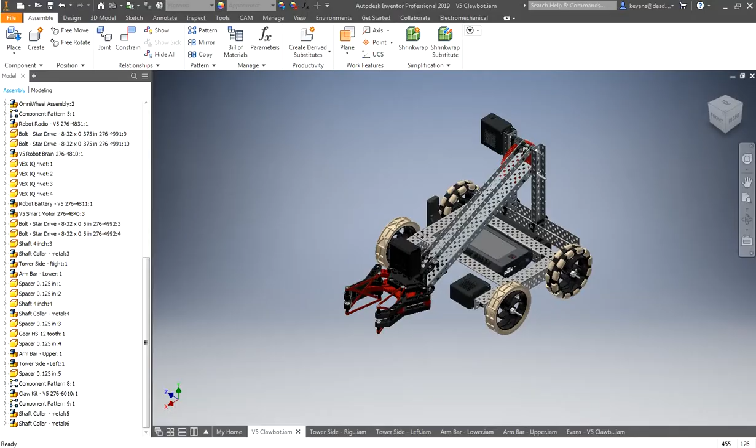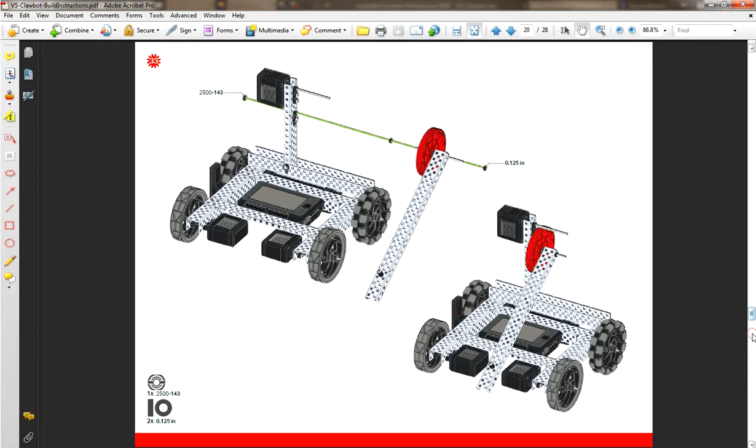Now, looking back at the instructions, you can see they have us build the tower sides, add a motor, connect one side, build the upper and lower parts of the arm, add a gear to the one side, and then start to install those onto the tower, eventually adding the second tower arm and completing it with the claw.

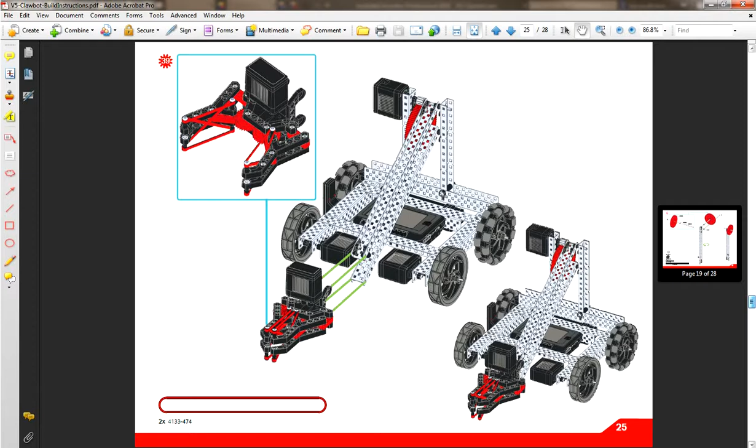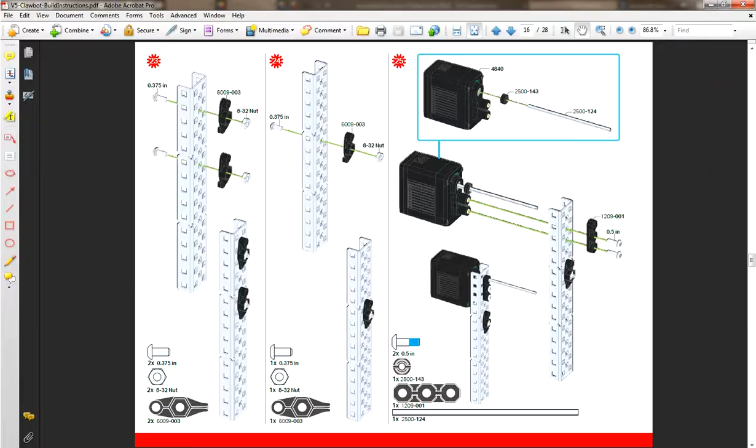Okay, we're going to follow a little bit of a similar procedure. The instructions have you build the two tower sides and set them aside till you need them, and then build the two arm sides and set them aside till you need them. We're going to do much the same in Autodesk Inventor. We are going to make small assemblies for the right side of the tower, the left side of the tower, the lower arm bar that we will attach a gear to, and the upper arm bar.

Looking at the instructions for how to build the tower sides, we can see we need a 15-hole C-channel and two of the single post axle bearings bolted on with 3/8" bolts and 8-32 nuts. The second tower side has one of these, but then we'll get a motor and a bearing flat.

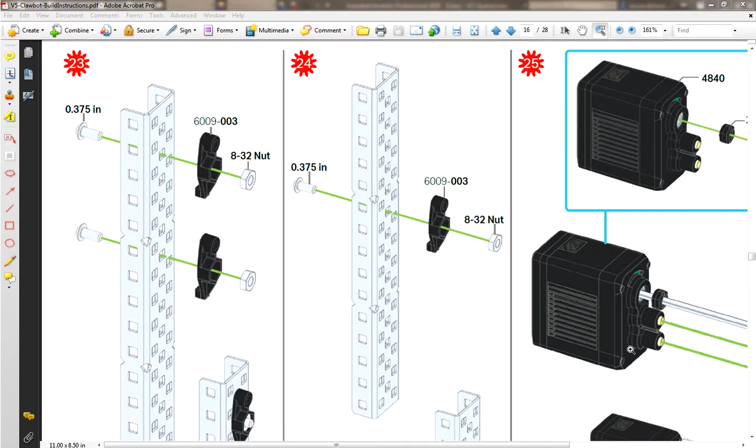So in Autodesk Inventor, I need to start a new assembly to make this separate little part. A couple of ways you can do that. I can go to File, New, pull an assembly out of here. I can just click here for the shortcut for new. I could also use Control-N, pick a standard assembly. I'm going to bring in the C-channel first in the structure folder.

15-hole, there we go. Now that bearing, nut, and bolt, if you recall, we used that earlier and made an assembly out of it. I don't need to place individual parts. I can just go back and find that assembly. One post bearing, nut, and bolt. I can bring in that assembly as one unit.

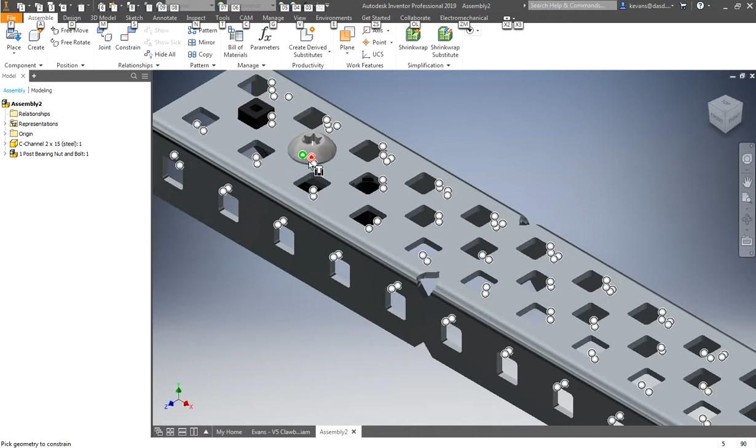The bolt from the picture in the instructions attaches in this second hole down on this side, and then we just have to spin around and get the axle in this location. There we go. I could simply add a second one. I could do a component or copy the pattern with the component.

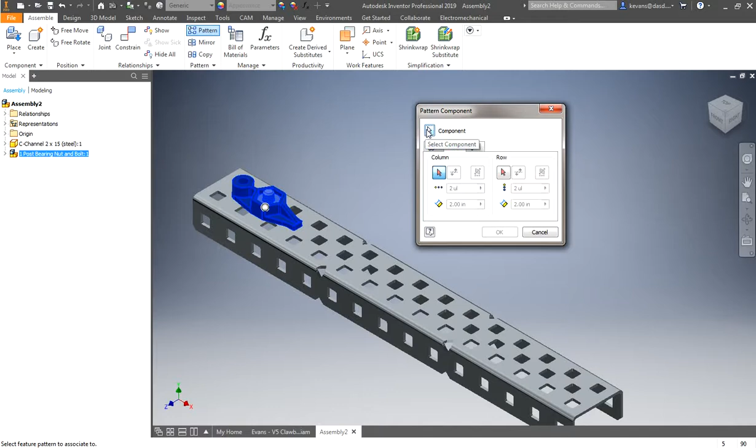So let's go back to the pattern feature. It's going to be a rectangular pattern. I already have this component selected. Pick my direction. We're going to go this way. I do have to flip it. By default it wants to go the other way, so I click the flip direction icon and I make sure it goes into the proper hole, and I believe that is the proper hole, just 2 inches down. Click OK, and we are done with that tower side.

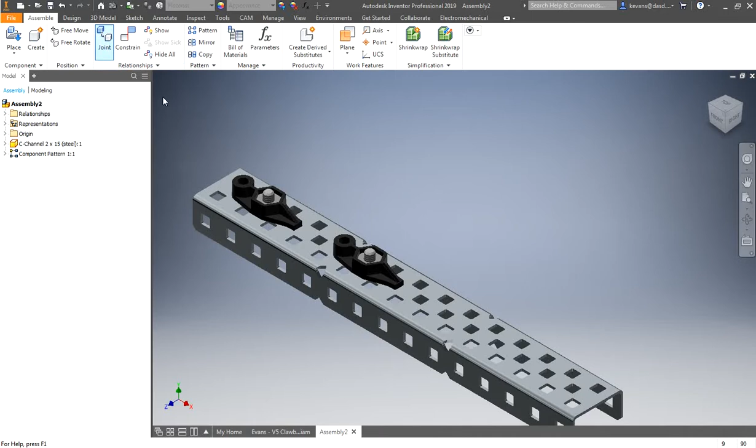Now we need to save it and give it a descriptive name, so I'm going to go save, and since it has never been saved and it is a new assembly, it suggests the name assembly 2 for me, but I do want to change it. I am going to call this a tower side, and when you're looking at the robot from the back facing forward, it is the left tower side.

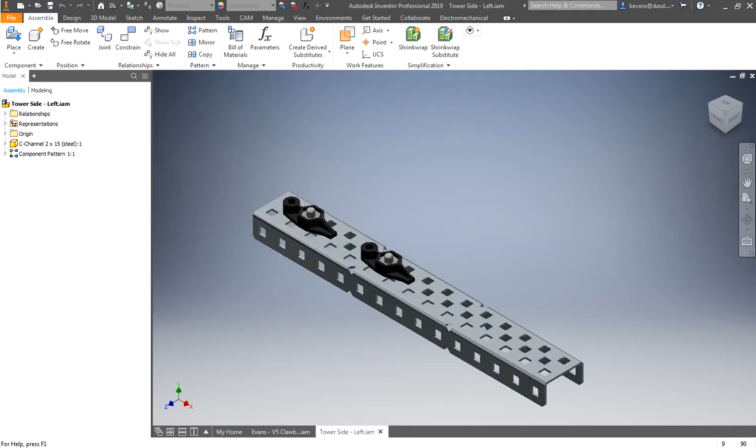To make the right tower side, I'm going to start with a new assembly. I need to bring in the parts we need. That will be a 15-hole C-channel. I will also need a bearing flat from the motion subfolder. And I will need one of the assemblies we just used with the single post bearing flat.

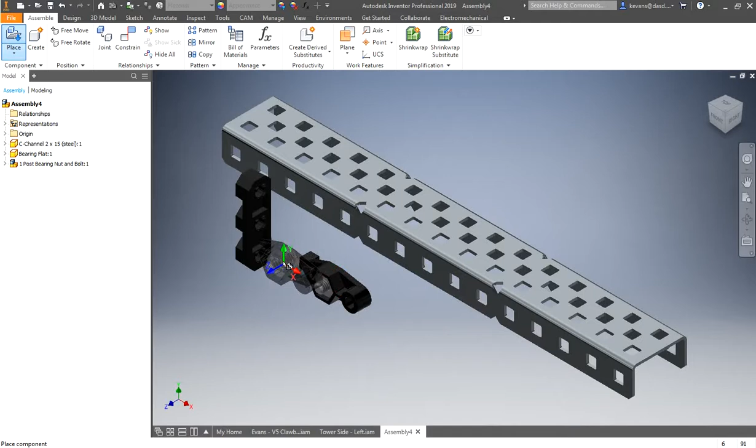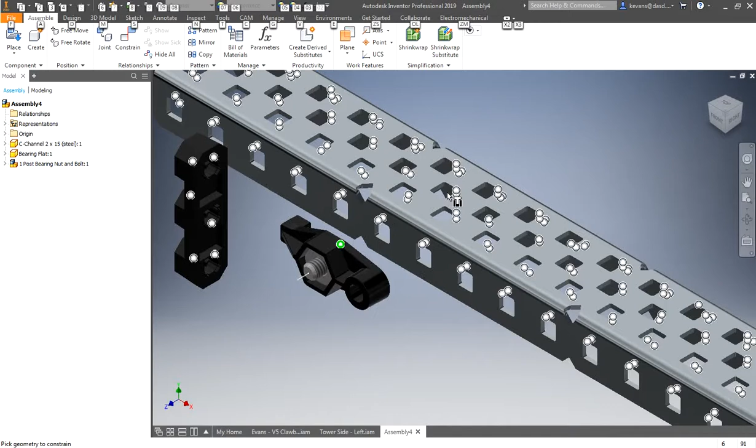Okay, now we're going to differ from the instructions just a little bit. In the instructions, they show you attaching a motor to this. We are going to wait and do that later. We're not going to make the motor part of this assembly. We want the motor to be a bit flexible and have that gearbox move in it. It's a lot easier to do that in the main model if it is not included in this subassembly.

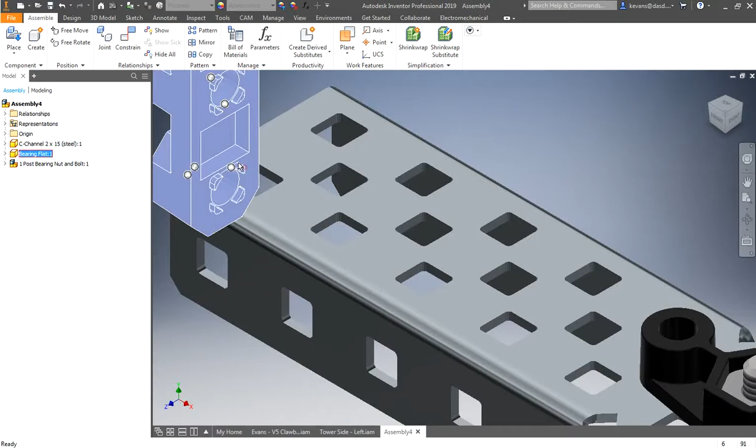Snap that around there, lock this in, and then this bearing flat just needs to be locked in to this top hole, and we can lock it into any one of these like such. That's all we need for the right tower side right now. Let's save it. I'm just going to take the previous name of tower side left and change it to tower side right.

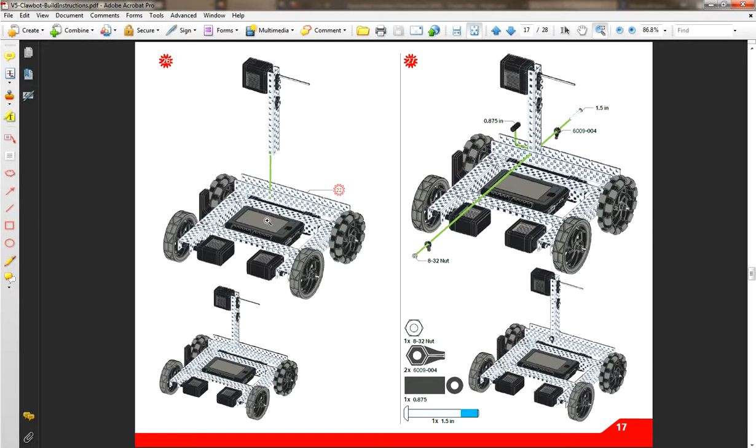Going back to the instructions, you can see that they want me to actually mount the tower side onto the robot. I'm going to hold off on that just for a moment. As long as I'm making assemblies, I'm going to skip ahead one step, and I'm going to make the assembly for the lower arm. Actually, this is the upper arm on the left. On the right, this is the lower arm. If you scroll ahead, you can see it gets the gear attached to it. So right now, we're going to focus on this upper arm. Then we'll make the lower arm.

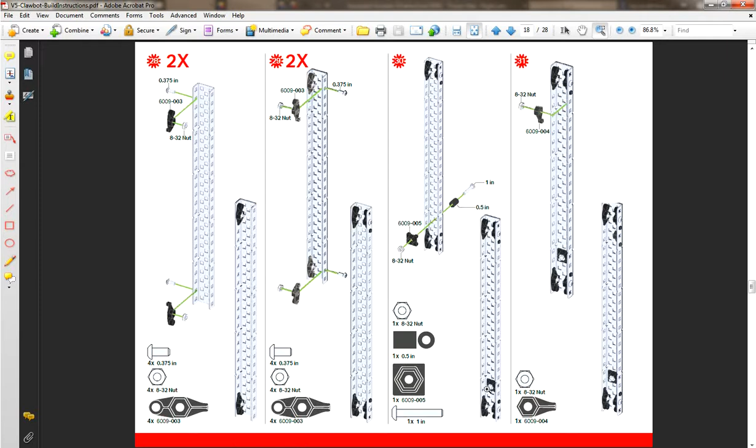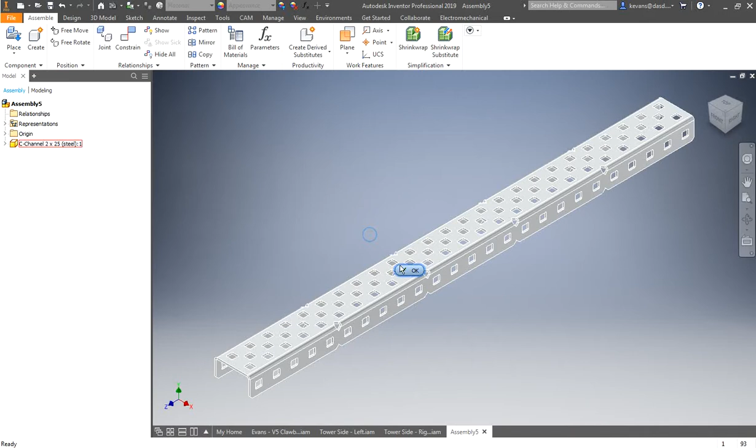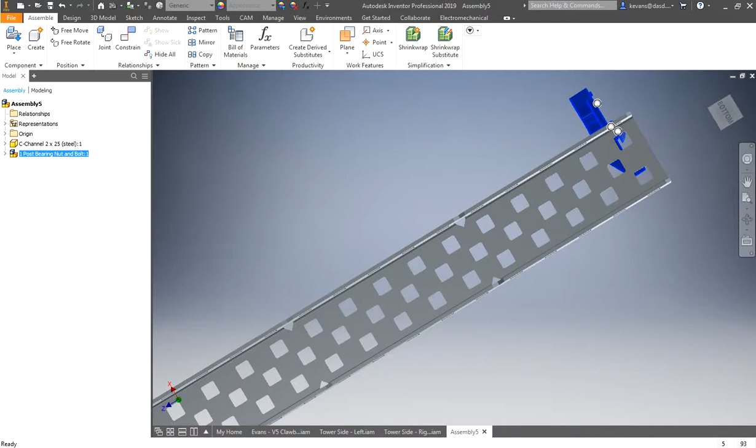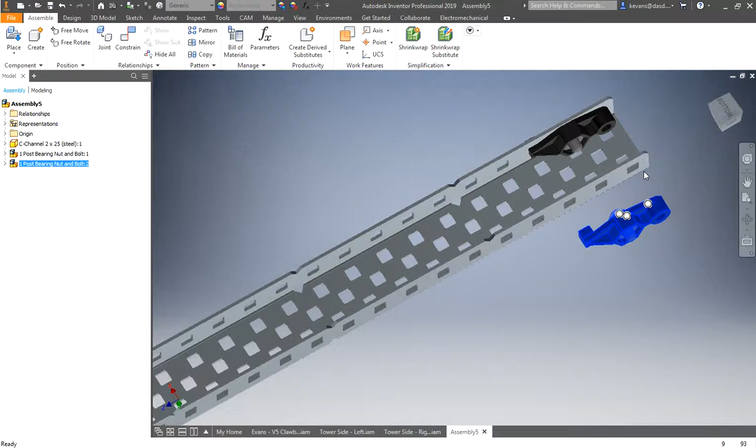So back in Inventor, we start a new assembly. I need to place a 25 hole bar. Did not mean to rotate that, but it's fine that I did. Going back to the instructions, you can see we need to have the same assembly that we used before with the one post bearing. Let's bring one of those in. Let's change my view to get to the bottom. And let's see if I can put one of these on the end hole. Now I need one on the opposite side. Let's bring in another copy from the model browser. Lock that in there. And that in there.

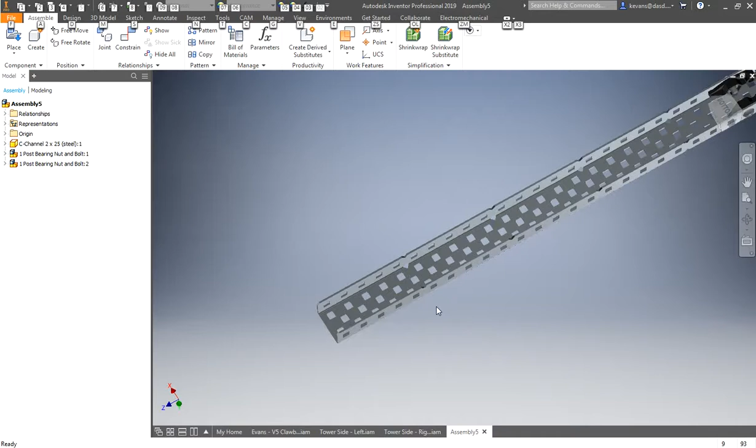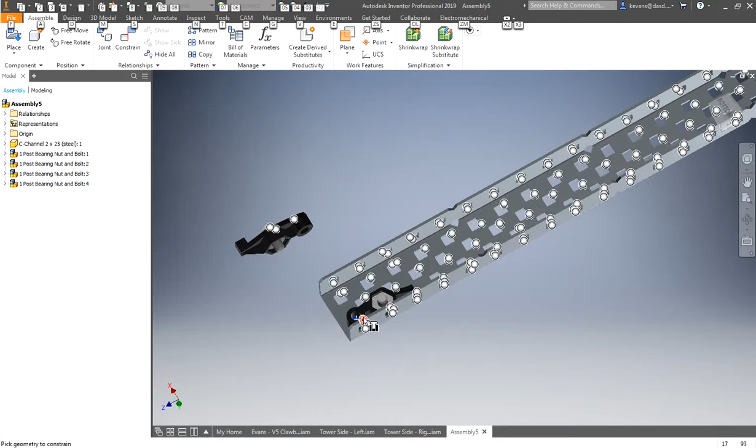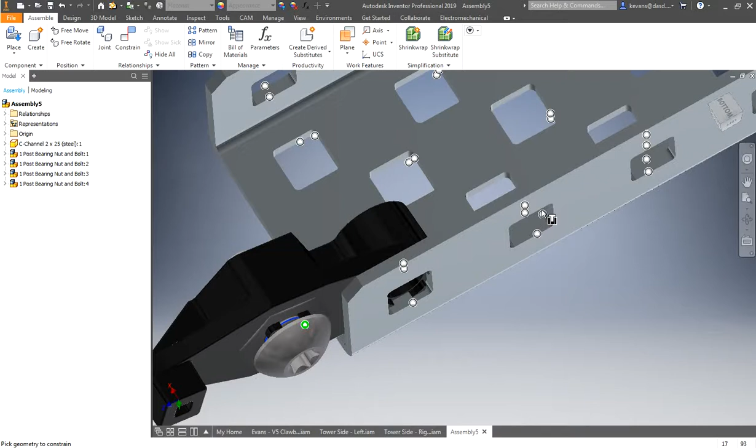Now at the other end, I need the same pieces, but they need to be flipped around. So doing a pattern really won't work. And there's only two parts. Instead of defining a plane and mirroring the parts, it'll be just as quick to place them. Let's lock that into place there. Whoops. Control Z. I'm going to undo. That wasn't where I needed it. Let me zoom in. I did the same thing. Want it on the side, right there. And this, right there. The final one.

There's my part. I'm going to save that. And we will call that the arm segment top.

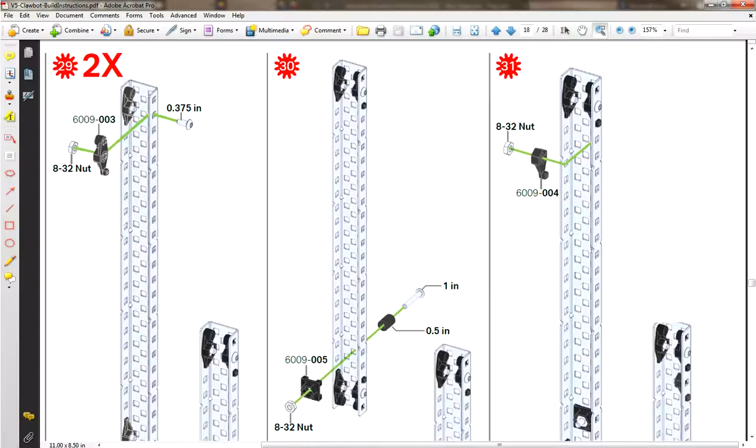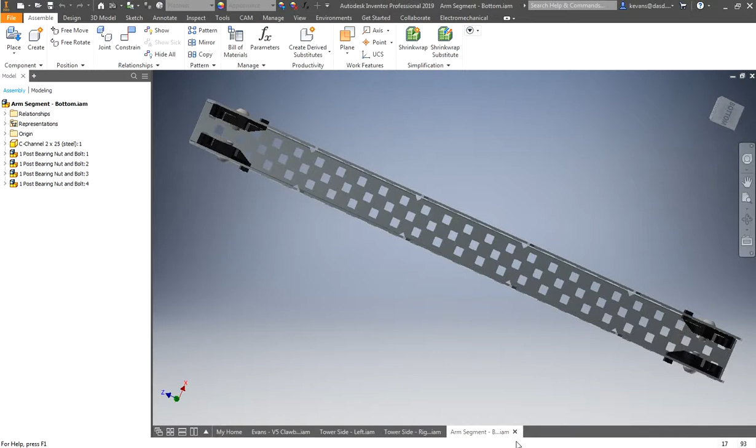Taking a look at the lower arm piece in the instructions, you can see that it begins the same as the top piece. Then you have the 4-post retainer that works as a stop between the arms here, and you also add this single post retainer at the top, which helps secure the gear at a later point. So back in Inventor, this starts with this exact piece we have right here. So I am just going to go to File, Save As, and I'm going to change the name of it. That'll leave my copy of the old one, the top piece. And I'm going to change the name to bottom, save it, and now I will be editing the bottom piece.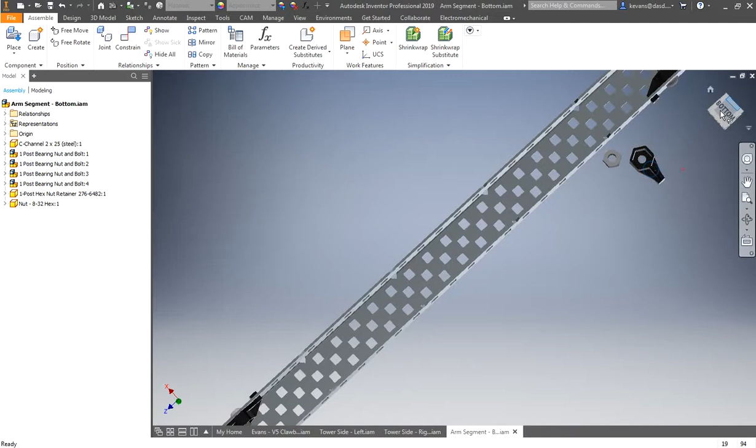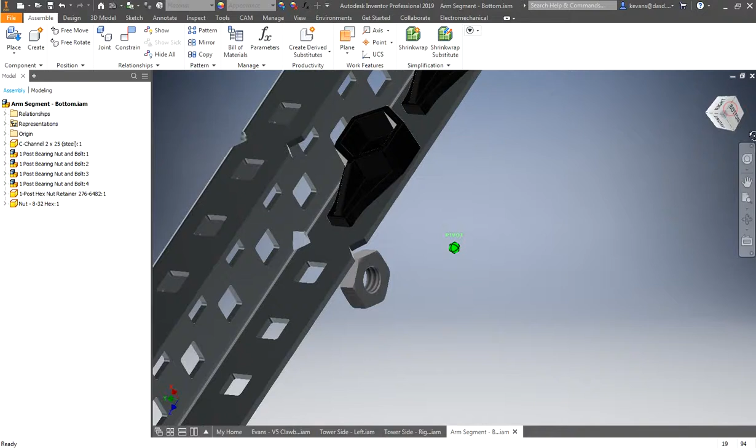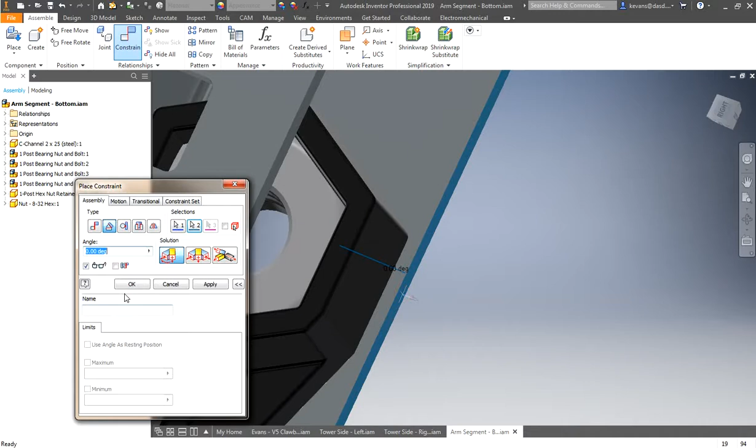We're going to start with the easier piece, which is just simply the one post hex nut retainer along with its corresponding hex nut. Place those. That goes right underneath one of these bearings. Grab that edge, snap it in here, and then I'll grab this insert, snap it in there. Need to get the nut in place. Grab one of the iMates and lock it in. I will need to get an angle, so I need to change the view a little bit, zoom out and back in, find that edge, constrain, angle to surface solution, that one and that one. Okay. Take a look at our view overall.

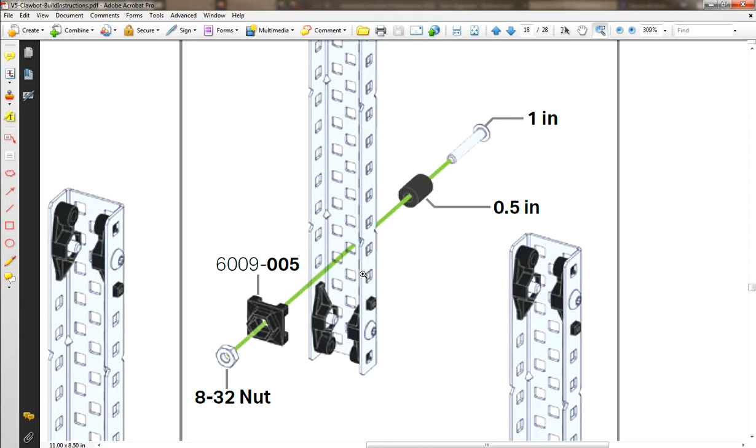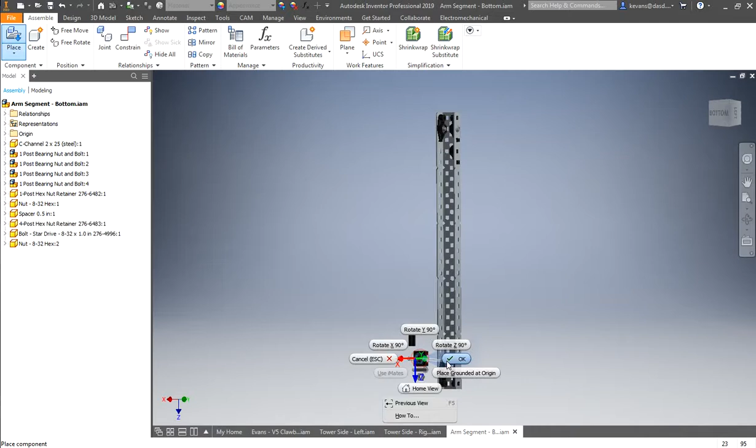Looking back at the instructions, we see that the safety stop has to go into the fourth hole here. To build the safety stop, we need these parts. So back in Autodesk Inventor, I'm going to bring those in. Start with a 1/2 inch spacer since I happen to be in the motion folder. And then from the structure folder, I need to get the 4-post retainer. I need the 1-inch bolt and the hex nut. Going to bring those in. Zoom in, make sure I get the fourth hole up. 1, 2, 3, 4. This needs to place here. Make sure I get it on the proper side.

Let's see, I need to get the I-mate on, yep, that side of it. And it posts not like that. Well, actually, yeah, it goes just like that. Oh, didn't get it. Let's try one more time. There we go. Put the nut on this side.

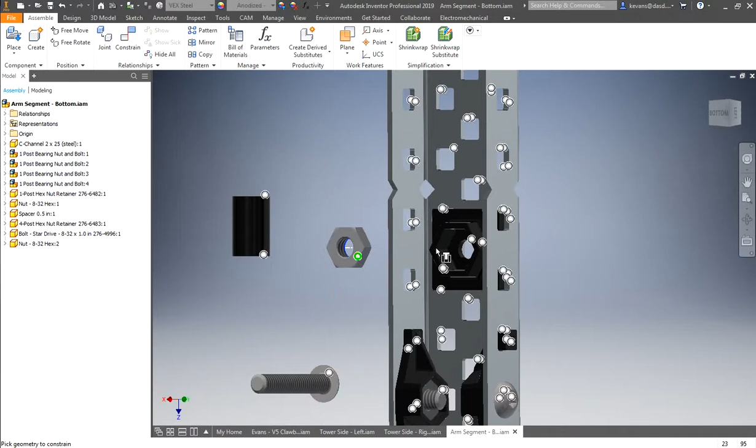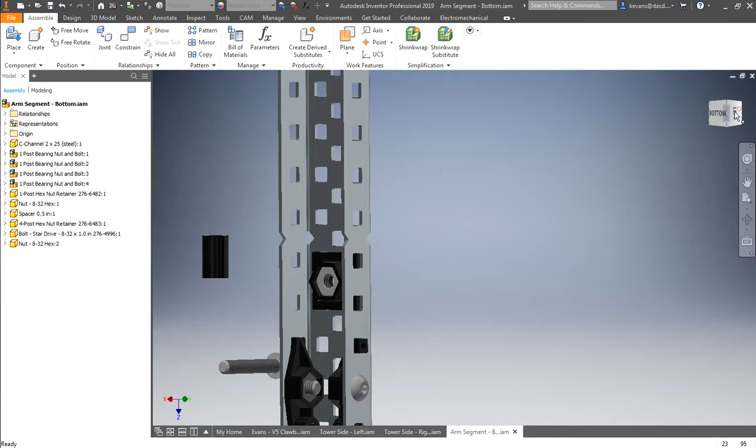Zoom in, try to get an edge and lock it into place with an angle constraint. Got that edge, 2-angle solution, parallel. That's good. Now I'm going to change my view, get the spacer and the bolt from the other side. Simple I-mate for the spacer to the sheet metal, and another I-mate for the bolt.

There we go. That is the safety stop. That will keep those bars from closing too much and pinching your fingers if you grab the robot by the arm and lift it.

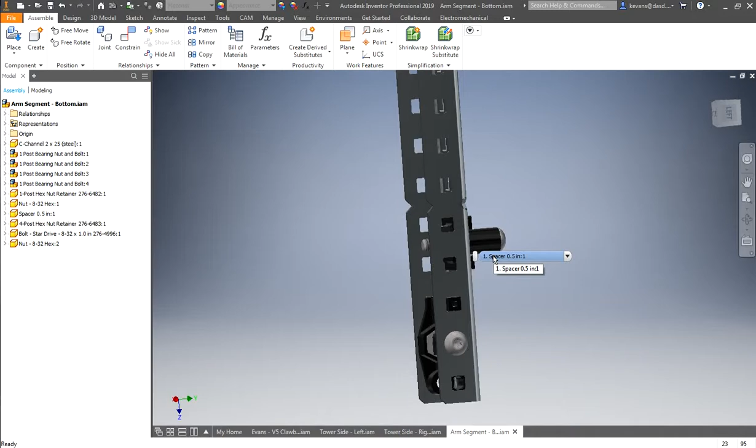Going back to the instructions, the next thing we need to do to this arm piece is to attach a gear with a couple of spacers and a bolt. Now, one thing that's different from the instructions is we are not going to put an axle in place. Not positive how far we need this axle to stick through the arm. It'll be much easier just to put that axle in place once we have the motor on the arm tower.

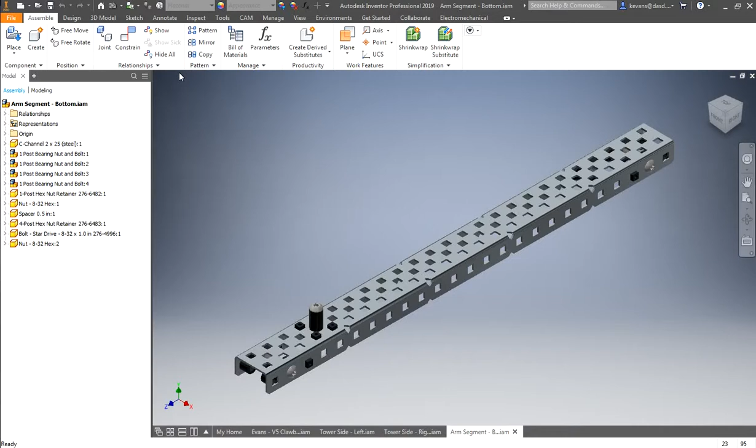So back in Autodesk Inventor, I need to place my gear. It is in the motion folder. Okay, there's already a gear with the inserts in place. So I'll just place that gear into our model. You can see there are some planes defined on the gear. We'll use that later for lining up the teeth.

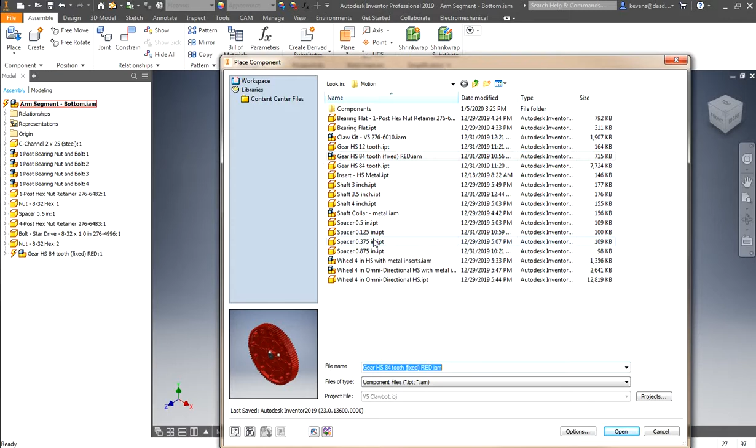Now I also need 2 1/8-inch spacers. There are my 2 spacers. And I believe I will also need a 1-inch bolt from the structure folder. Let's go back to the instructions and double check what we're doing.

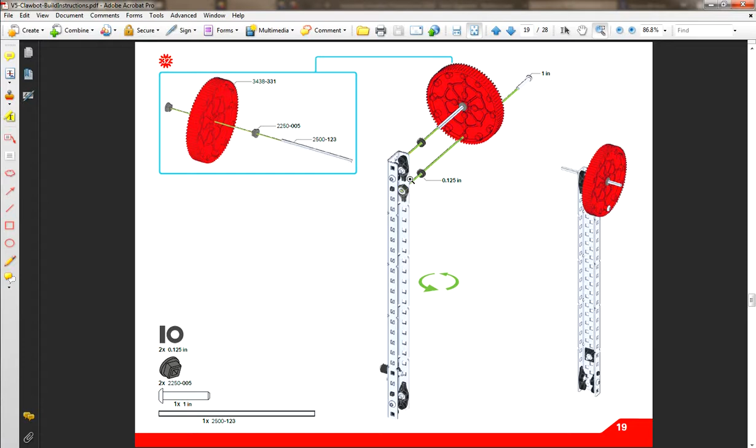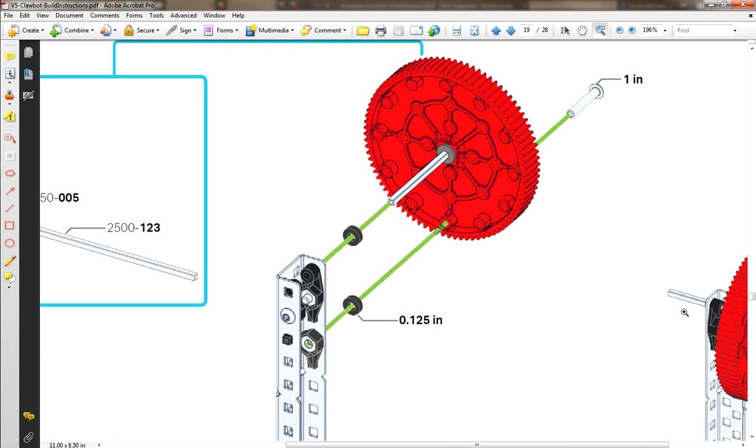Now on the top of the piece where we have that single 1-post nut retainer, we have the gear attached here where the axle will go through, spacer in between it, and then the bolt will go through into that. Back in Inventor, that piece is on this side, right there.

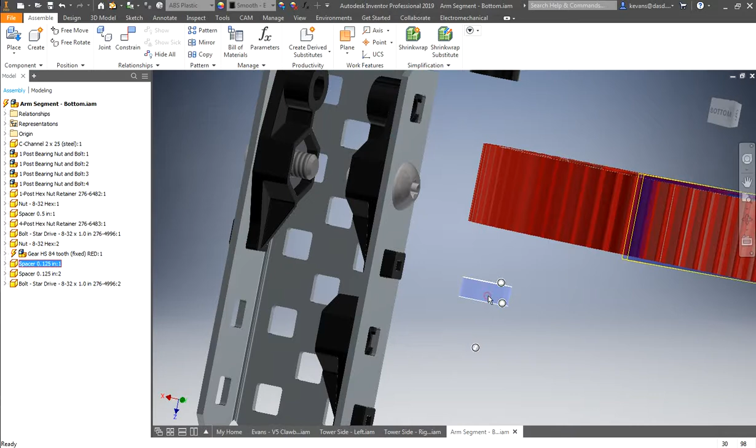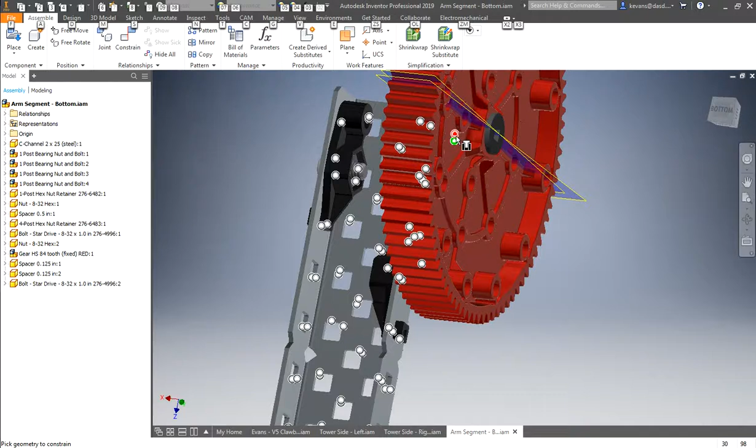Let's put the spacers in place, drag them up close to where we need them, zoom in, and let's just lock them in place with some I-mates. Next is the gear. Now, let's see, we'll take this I-mate, snap it in here. Now the gear is free to rotate.

I'm going to need to take one of these and line it up with the bolt hole. Now the easiest way to do that is just to line up the centers of the holes. Don't actually have any I-mates on these, so I couldn't use them even if I wanted to. But all I'm going to do is go to my constraint menu.

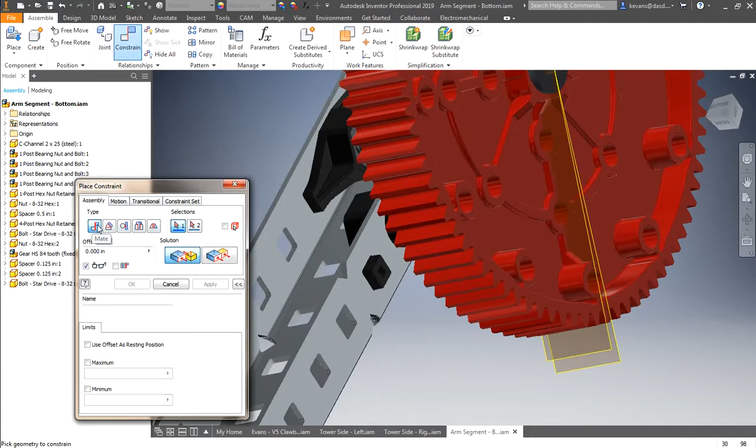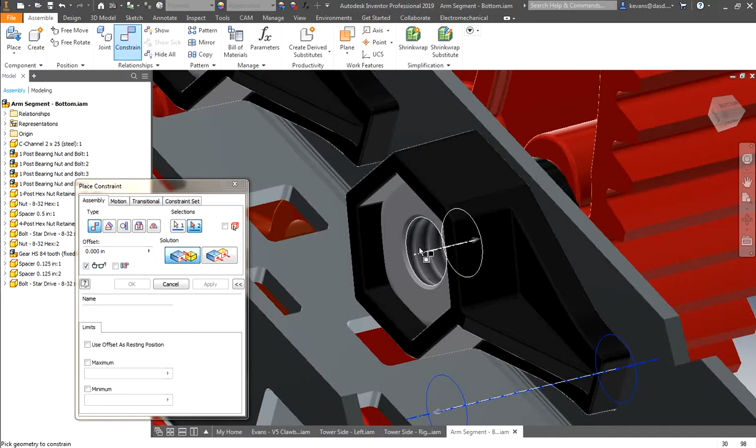I'm going to leave it on the mate constraint, and I'm going to select an inside edge of one of these holes, and you can see the center line is highlighted through that hole. It's the axis. I'm going to select that for one of them. I'm going to turn around and select the center line of either the black retainer or the nut. That lined them up. Click OK. Now it moves with the arm.

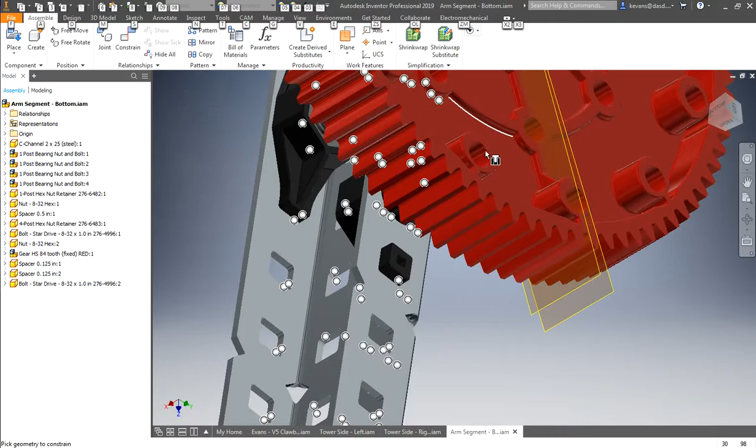The only thing left I have is to drag the bolt over and snap it into the proper hole right there. For that, I can pull an I-mate. Even though there's no I-mate on the hole, Autodesk Inventor knows I have half of an insert constraint, and it will look for something else that I can insert right there. There it is. Just like using an I-mate almost, even though one was not there.

There we go. We can save this. It's already been renamed as our bottom arm segment. From here we can move on to assembling the pieces of the arm onto the robot.